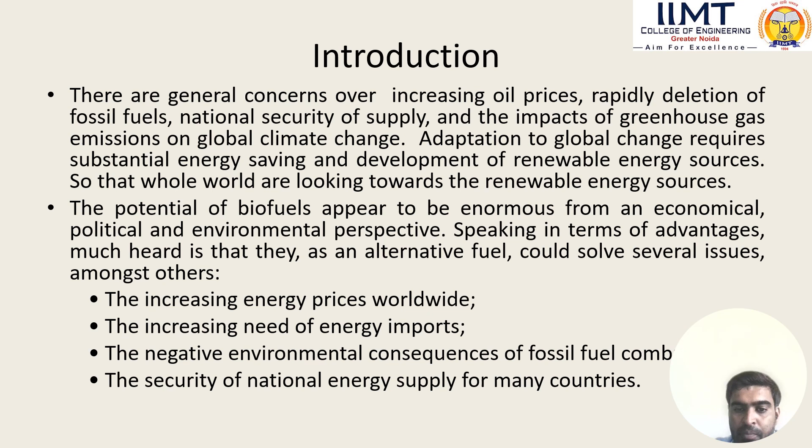This is the petrol-based energy consumption data. Energy consumption of India is a third of the rest of the world's average energy consumption. Most energy consumption is taking place in our country, and 34% of the energy requirement is fulfilled by crude oil, of which 83% is imported.

So this imported oil greatly influences our nation's economy. We should be dependent on our own energy resources. So we should make our own energy resources.

The world transport heavily depends on petroleum-based oil. Everybody knows that transport vehicles play a very vital role in consuming petroleum-based oils, and apart from that, they emit very harmful emissions like CO2, NOx, and particulate matter.

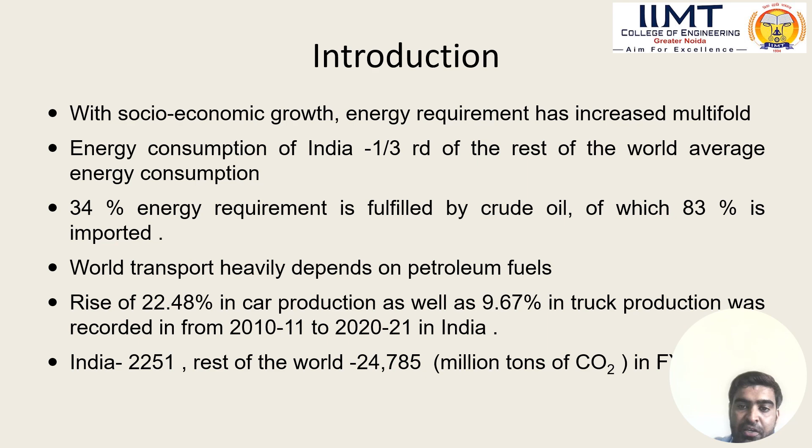Data shows a rise of 22.48% in car production as well as 9.67% in truck production from 2010-11 to 2020-21 in India. So this is the overview of the energy consumption data.

As we have discussed, compression ignition engines like diesel engines play a very vital role in transportation, agriculture, civil construction, and power. These engines are very responsible for emissions and fuel consumption. This is the limitation, as we have discussed: they emit smoke particulate matter and NOx emissions.

So keeping these factors in mind, biofuel can be obtained easily from waste cooking oils. Waste cooking oil is used cooking oil which is discarded after using one or two times into sewages, due to which water pollution occurs, and this water pollution is very harmful for human beings.

So it is very good to use waste like waste cooking oil as a biofuel, by which two targets can be fulfilled: first, it can substitute petrol-based oil; second, water pollution can be avoided by using this waste cooking oil.

But it was seen by many researchers and from literature review that when biofuel is used with diesel engines, the performance of the diesel engine decreases slightly, but there is an improvement in emissions like CO2 and NOx.

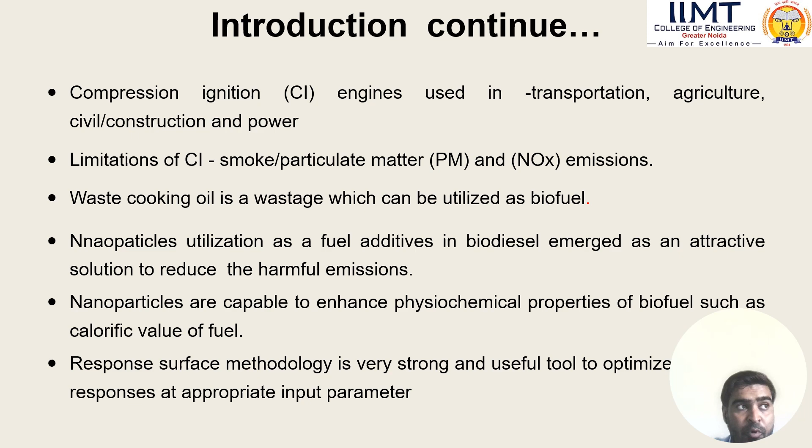About the biofuel molecular structure, it is very important to know about it because it was seen by researchers that the biofuel molecular structure is similar to diesel. This is the first reason it can be easily used with the diesel engine without any modification into the design of the engine.

So this is the fatty acid composition of the various types of biofuels. Biofuel contains various types of fatty acids like lauric, myristic, palmitic, stearic, oleic, etc.

These are the fatty acid compositions of various types of biofuels like sunflower, rapeseed, soybean, peanuts, olive, etc. There is a very slight change in their fatty acid composition, due to which there is a slight change in the physical properties of the biofuel. So various types of biofuel feedstocks have slight changes in their physical properties like viscosity, calorific value, density, iodine value, etc.

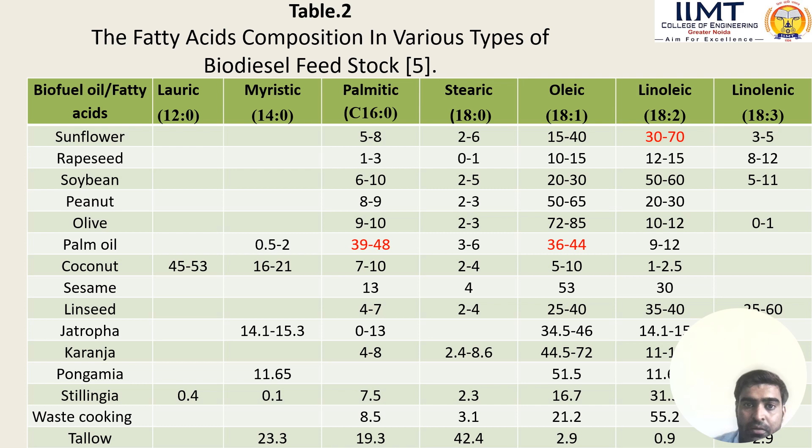Now, what is the effect of biofuel composition on the properties, emissions, and combustion characteristics of CI engines? Actually, the composition of biofuel mainly consists of two types of acids.

One is unsaturated free fatty acids, and second is saturated free fatty acids. Unsaturated free fatty acids are those which consist of double bonds, and saturated fatty acids consist of single bonds in the molecular structure of the biofuel.

The unsaturated free fatty acids are like oleic acid, linoleic acid, and linolenic acid, and the saturated fatty acid is palmitic acid, etc.

Actually, the unsaturated acid consists of a double bond, which means it contains more oxygen molecules compared to the other fatty acids, due to which the combustion of the biofuel takes place at a higher temperature.

Those biofuels which have more unsaturated fatty acid, if injected into diesel engines, the combustion will take place at a higher temperature because more oxygen molecules will participate in the combustion.

Not only does the combustion take place at a higher temperature, but proper combustion will take place, due to which there is a decrement in carbon monoxide, carbon dioxide, hydrocarbons, and smoke, but the NOx emission increases because at higher temperature, more oxides of nitrogen are generated.

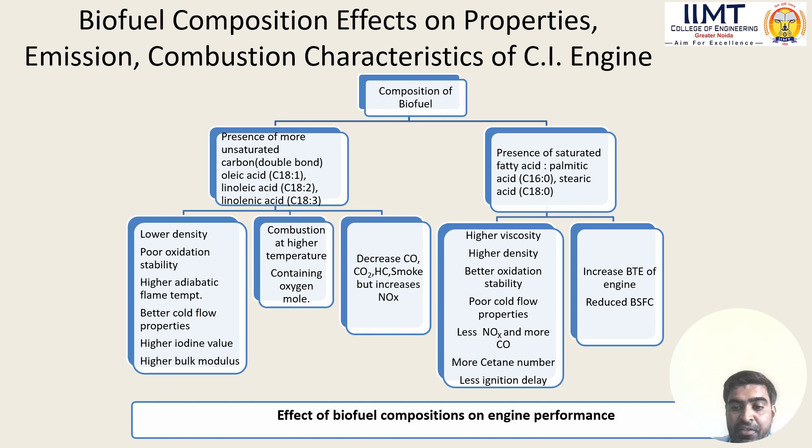This is the comparison of the physicochemical properties of different types of biodiesels. Actually, due to their slight change in fatty acid composition, different types of biofuel have different physicochemical properties like flash point, viscosity, density, calorific value, and cetane value.

But there is a very slight variation in their physicochemical properties because there is a slight variation in their free fatty acid composition. Actually, free fatty acid composition is directly correlated to the physicochemical properties of the biodiesel. So different feedstocks have different viscosities, with slight changes like sunflower, rapeseed, soybean, peanuts, palm oil, etc.

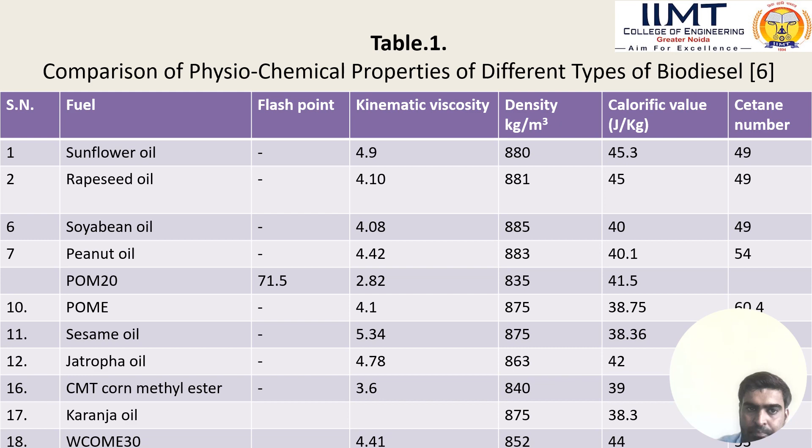It was seen by researchers that when biodiesel is used in a diesel engine, its thermal efficiency decreases compared to diesel oils, and the brake specific fuel consumption increases compared to diesel and petroleum based oils. The CO2 and unburned hydrocarbon emissions decrease, but the NOx emissions increase.

So to improve engine performance and decrease NOx emissions, nanoparticles are added to the biodiesel to boost engine performance and reduce emissions. What is the reason behind that? Why does nanoparticle addition reduce emissions and increase engine performance?

Nanoparticles have the highest surface to volume ratio. When nanoparticles are blended with diesel, the diesel exposes more surface area to the air, which accelerates the evaporation process, increases the heat transfer rate, reduces the ignition delay, and increases engine performance.

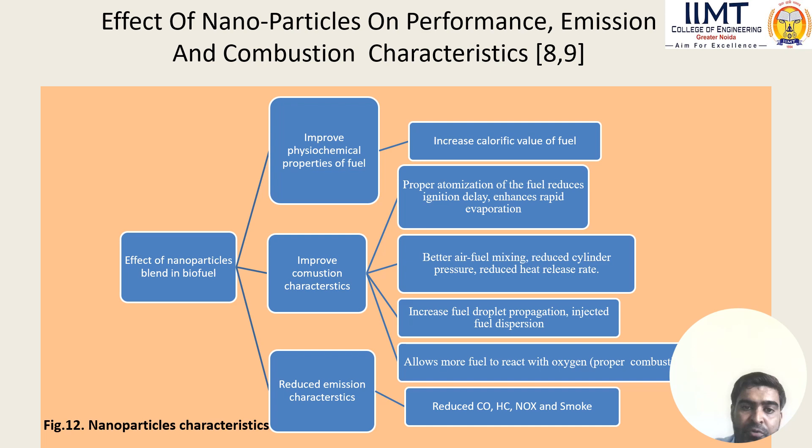So nanoparticle additives may prove to be very good fuel additives to enhance engine performance and reduce emissions.

When nanoparticles are added to diesel used in the engine, it also increases the calorific value of the diesel. So it not only improves the calorific value but also other physicochemical properties like flash point and kinematic viscosity. So metal nanoparticles make a very good fuel additive.

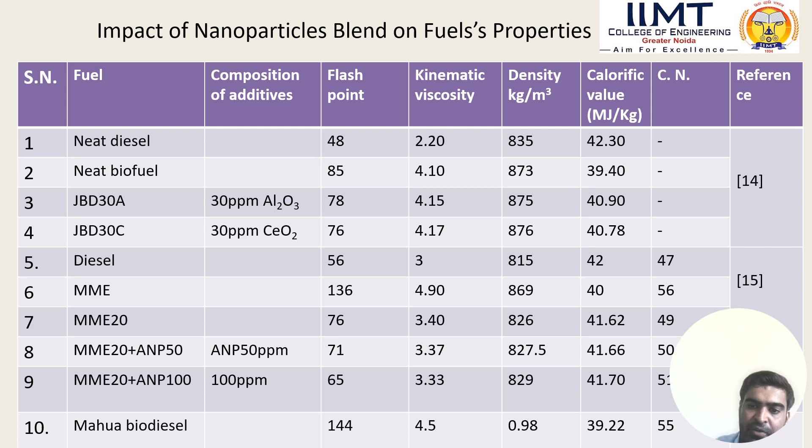This is also the data of nano biofuel blends.

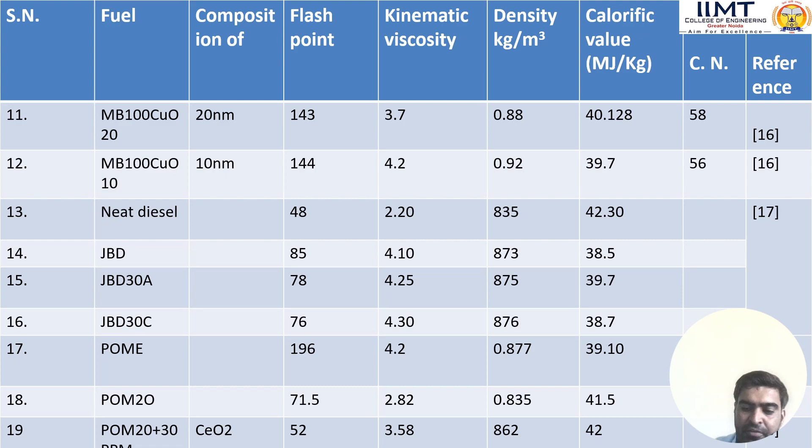Transesterification is a very good, worldwide accepted process, very cheap and effective, through which we can prepare the biofuel.

During this process, the biofuel is mixed with alcohol in an appropriate molar ratio along with a catalyst. The catalyst may be KOH, NaOH, or H2SO4, used according to the suitable biofuel feedstock.

After mixing the catalyst and alcohol with the biofuel, it is heated to a range of 70 degrees Celsius, and a suitable RPM is provided to the whole system, to the whole feedstock.

After two to three hours, it was seen that two layers are formed: one layer is the pure biofuel, and the second layer is the glycerin layer. This glycerin layer has a higher density and is very heavy, so due to the sedimentation process, it separates out from the biofuel.

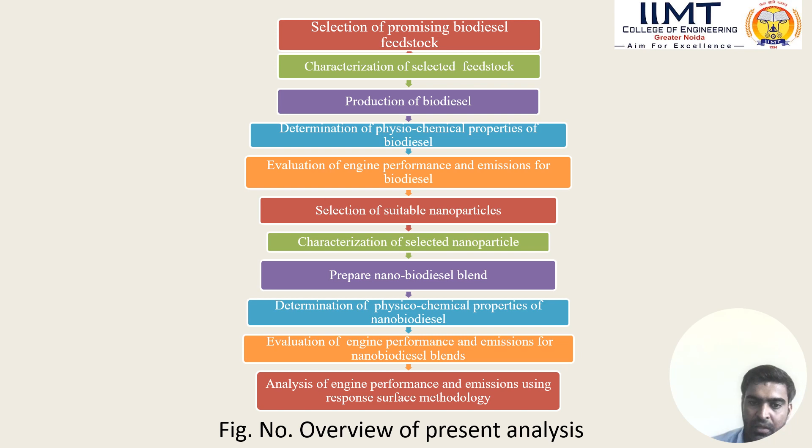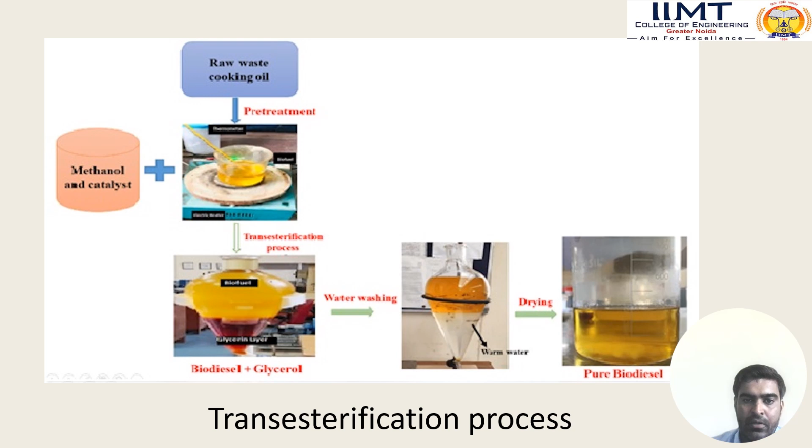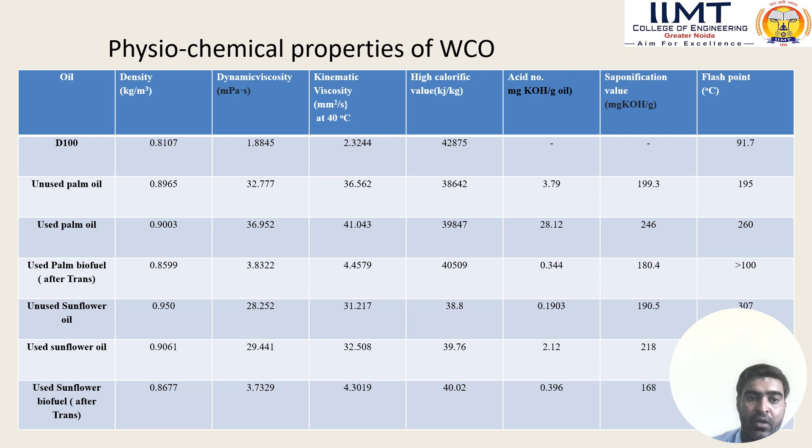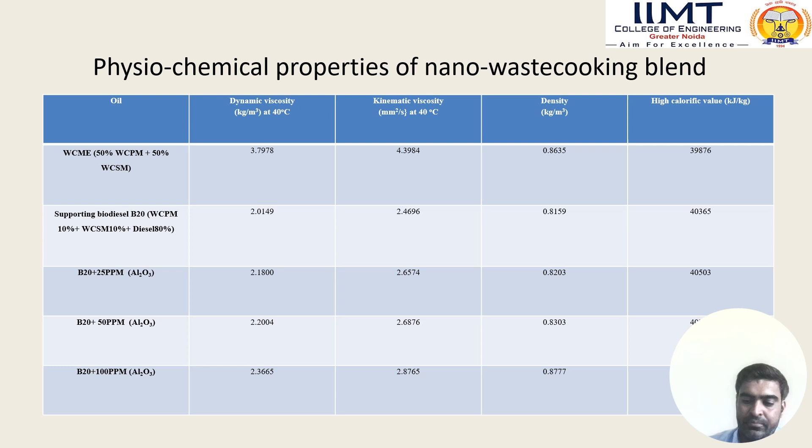Next, these are the graphs. This is the variation of specific fuel consumption with respect to load. It shows that addition of the nanoparticle reduces the specific fuel consumption of the biodiesel compared to other samples like diesel, B20, and the other samples.

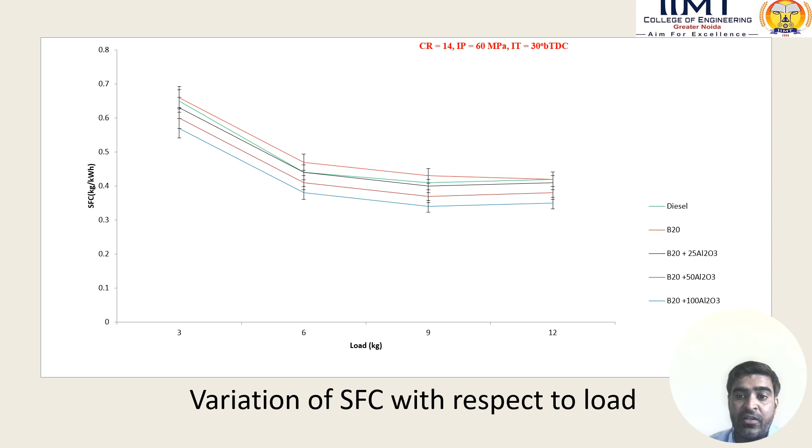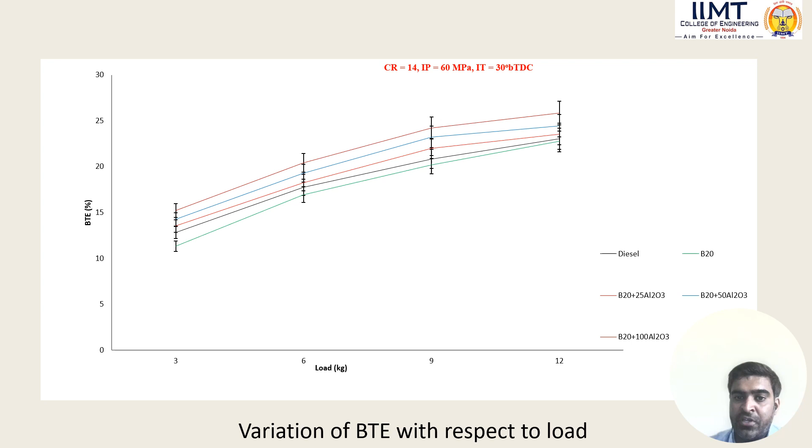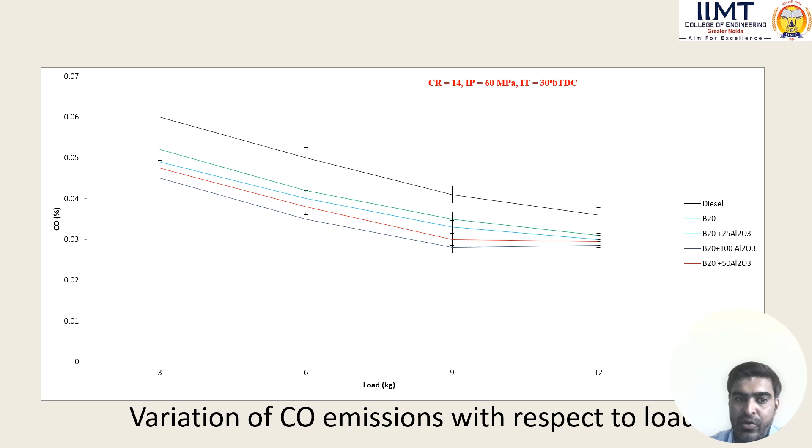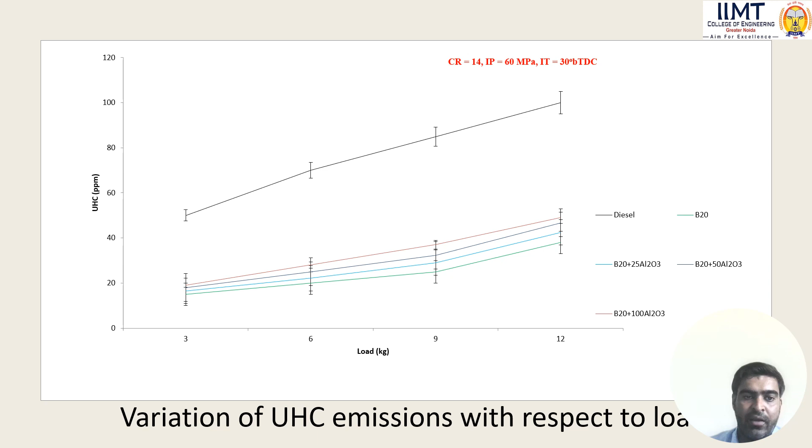This is the variation of brake thermal efficiency with respect to load. It was seen that the added nanoparticle enhances engine performance compared to B20 and diesel. This is the CO emission with respect to load, and it was seen that addition of the nanoparticle reduces CO emissions compared to the other samples. A similar phenomenon is seen for hydrocarbons, which are also reduced when the nanoparticle is added to the biodiesel.

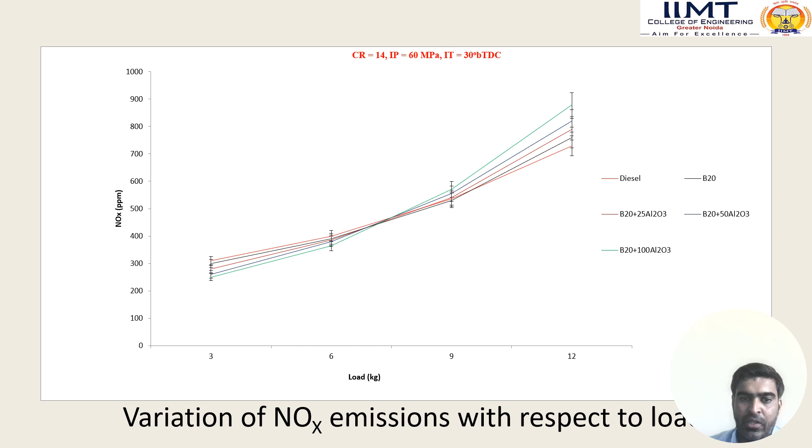This is the NOx emission; there is a very slight change in NOx emissions. Consequently, it was seen that the addition of nanoparticles reduces emissions and improves engine performance, so it can be proved as a good substitute for petroleum-based oil.